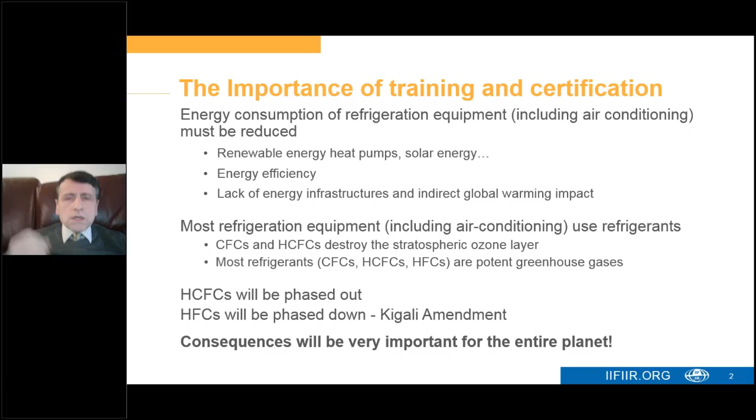And at the same time, we will have to phase down HFCs because of the Kigali Amendment of the Montreal Protocol. Of course, in developing countries, it is still not an obligation. We will start it in 2024 or 2028, but we already have to prepare it. We cannot wait until the phase out of HCFCs to move to low global warming refrigerants, and consequences will be very important for the entire planet. Because of the Paris Agreement, because of the Kigali Amendment, we have to face these challenges.

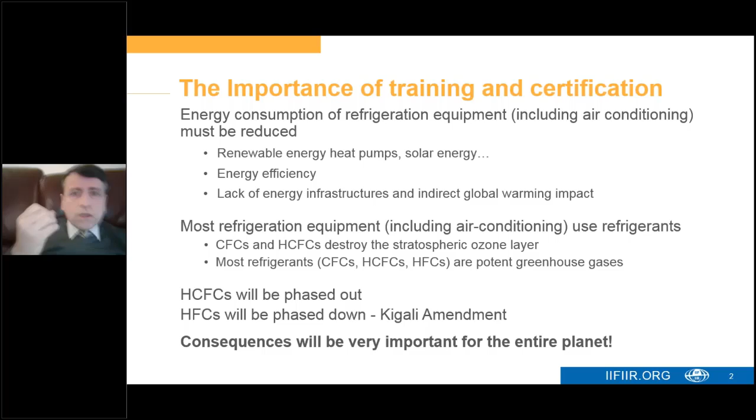Next slide, please. So we cannot wait for the phase out of HCFCs, and there are two issues for moving to low global warming potential refrigerants: safety and energy efficiency. So we need people who are able to install safe equipment and energy efficient equipment.

And because of that, training is necessary, absolutely necessary, because the use of these low global warming potential refrigerants is not exactly the same as the current refrigerants. Real Alternatives for Life is a remarkable tool for it. The International Institute of Refrigeration and its partners, and you will have afterwards the presentation by our partners in this European program, are at your disposal to help you.

Of course, it is a European program, but as you know, Europe is in advance of other countries. So in any case, the experience we have in Europe, the training we have developed in Europe can be applied all over the world, and I'm sure that it will be useful for all the world.

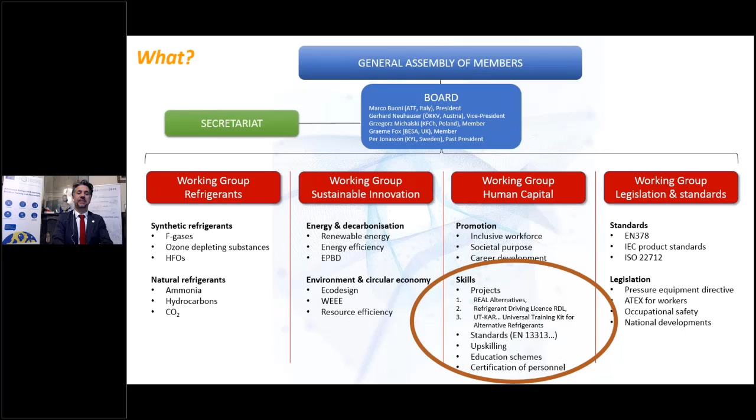So about AREA, we are an association of 25 European associations from 21 countries. We have a working group about human capital, training, about increasing competencies, and 3 projects about it: Real Alternatives, the refrigerant driving license, and universal training kit for alternative refrigerants. We work also on standards, in particular the EN 13313, which is a European standard that is becoming an international standard called ISO 22712. So our aim is to have skills and to have certification and education.

We have guides about it. We have translated in 16 languages guides about COVID, about EN 378, about training, and about certification. You find all of them on our website. But what we want to show you today is the revision of the F-gas regulation and why training is important in this revision. We are starting now a revision, a consultation.

First was a roadmap and an impact assessment. Now we are in a consultation process, and all the stakeholders are giving inputs to the F-gas regulation, what should be improved and changed. And all of 2021 will be for that, for stakeholder workshops, presentation, preliminary findings, impact assessment concluded, and in December, probably we are going to see a proposal for a revision.

And in 2022, 2023, after the ordinary legislative procedure, the European Parliament and the Council will adopt a new F-gas regulation. And what is the aim of this F-gas regulation? We want, first of all, to align with the Montreal Protocol, of course. We are already phasing down HFCs, but we want to align completely with Kigali. And further reduction in sectors not covered. Also the implementation and enforcement issues, illegal trade, training with alternatives, and other issues we want to tackle.

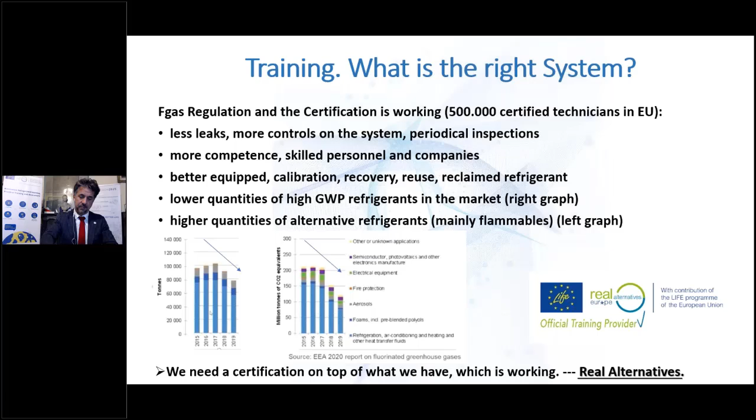And on top of these findings, we see that we need certification. We need more training for the use of alternative refrigerants, which are flammable, toxic, and high pressure. And so we need Real Alternatives. We need our project, Real Alternatives for Life, which Silvia, my colleague, the coordinator, is going to show you in a second.

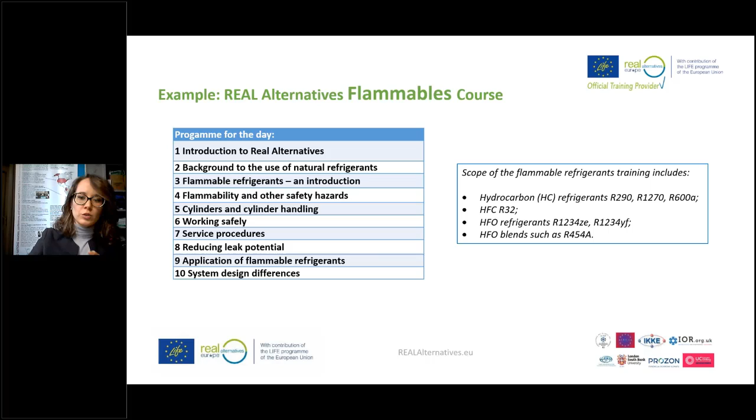There will be also something about the e-learning, but we don't have the time to go deep into that.

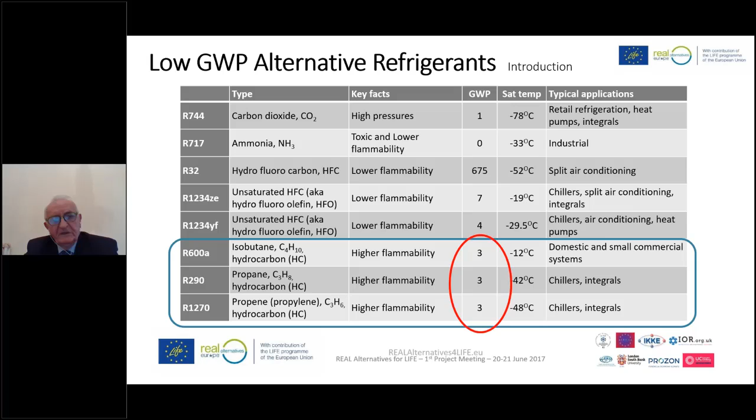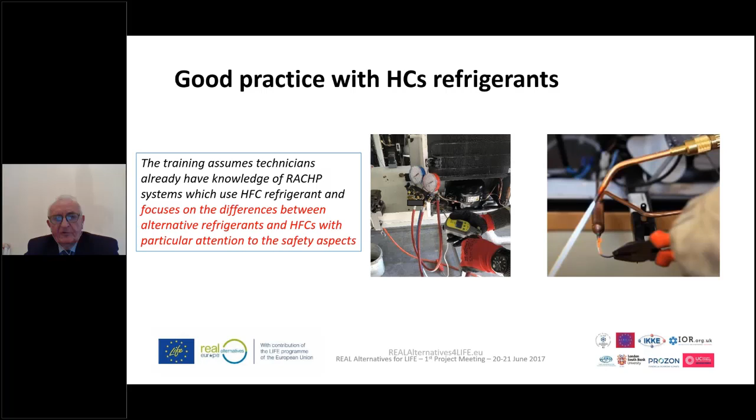The training assumes that the trainee already knows what to do with the HFC. So the training focuses on the differences between alternative refrigerants and HFC, with particular attention to the safety aspects. For the hydrocarbon, mainly it means flammability or risk of explosion. Next. Flame can happen when you have a potentially explosive atmosphere and have inside a source of ignition. Next.

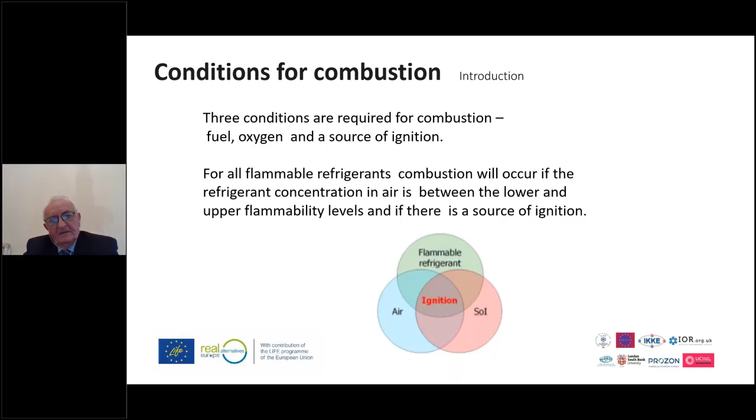For this reason, the main rules to be applied when someone has to design the system using the hydrocarbon are: first, sources of ignition must be removed from the flammable zone. Second, if you have electrical devices inside a potential flammable zone, these devices will be non-sparking type. And the training shows all the process step by step, how to reach this result when designing the system. Next.

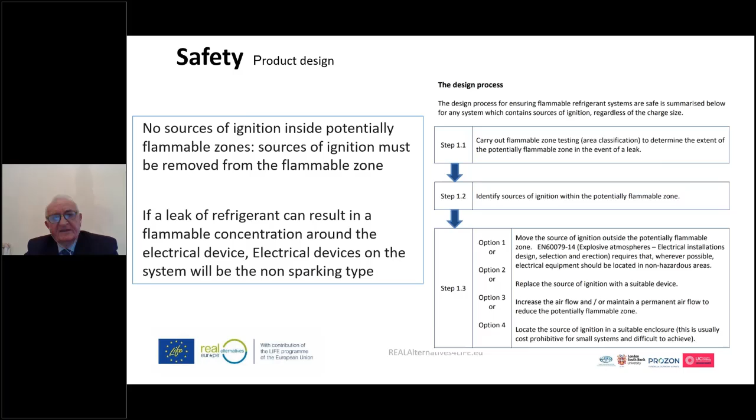There are a lot of details for the various operations, like, for example, the electrical connection that can be inside the potential flammable refrigerant zone, the fuse types and their use, the type of cable, boxes, etc. Next. And there are notes on the ventilation, like the fan for the condenser or evaporator, that can contribute to dilute, to dissipate the dangerous concentration of refrigerant from potential leaks. And there are warnings on possible abnormal use of the cabinet in the field, as well as about failure of some components. Next.

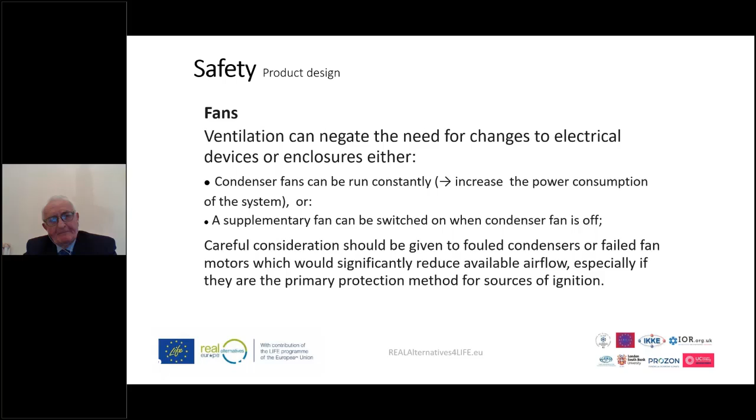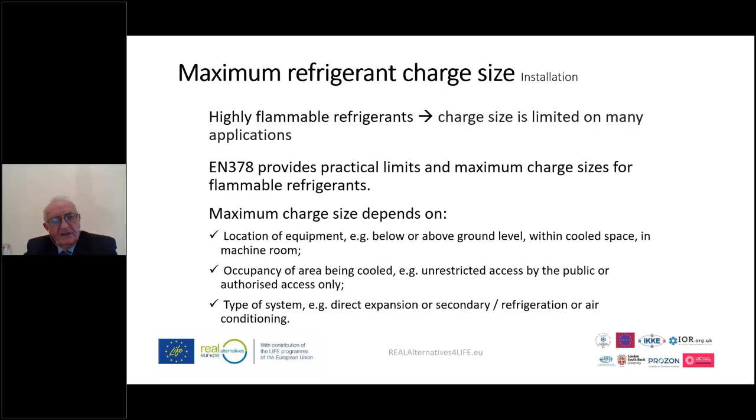When you have a cabinet, you have to install the cabinet in the field, of course, and the hydrocarbon, being highly flammable, has a size limitation for the refrigerant charge. The training shows you, according to the EN regulation, how to size the refrigerant charge according to the location of the equipment, occupancy of the area being cooled, and the type of the system. Next.

When you have a proper cabinet properly installed, it has to run for a certain time for its life, and you have to operate preventive maintenance and eventually repairing. Repairing in the field for the hydrocarbon represents the moment of higher risk. And the training has details and pays a lot of attention to this part of the activity.

First of all, it's necessary to carry out the risk assessment. That means evaluate the likelihood of a negative event and the impact of this event, and take preventive action in order to minimize the risk to a level that you can run without problem. Next. There are indications on the proper tools to be used, and you can practice the tools in the practical training in the classroom. Next.

And preventive actions to be adopted are listed with a lot of details. The working area must be very well ventilated, eventually with fan motors that need to be ATEX approved. It's necessary to use a personal monitor and detector. It's important not to have an ignition source in the working area for a volume, let me say, of around 3 meters, and have a fire extinguisher at hand in case of use. Next.

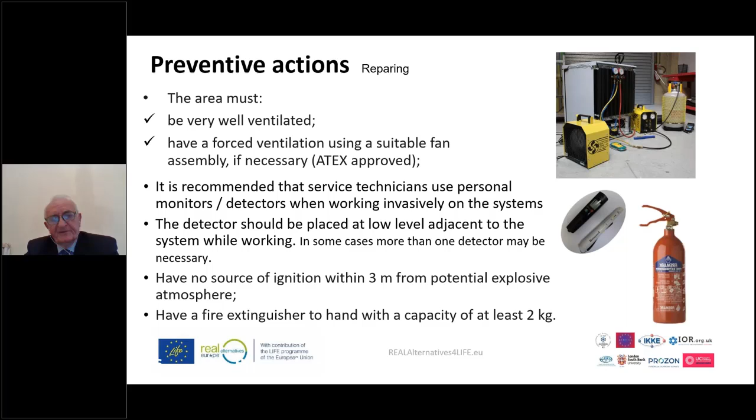Also, there are instructions about the equipment to be used with flammable refrigerants. The equipment used with hydrocarbon and other flammable refrigerants must be ATEX approved, especially the recovery machines, and in certain cases also the vacuum pump, and there are solutions for adapting a standard vacuum pump. And for each operation, like refrigerant recovery or vacuum in the system, there are step-by-step all the instructions to follow in order to perform the proper operation in safe conditions. Next.

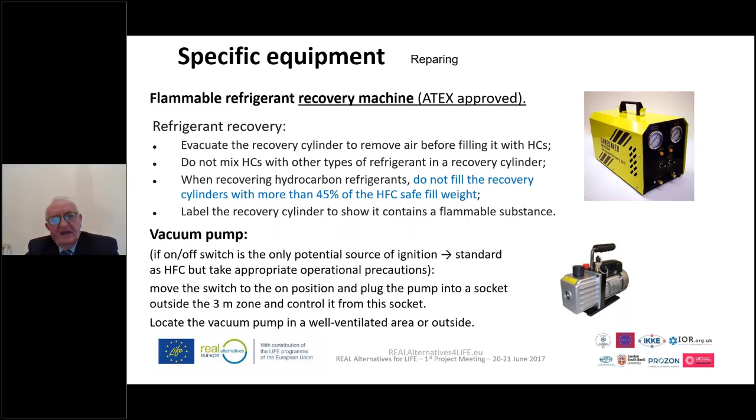Particularly critical is the brazing and unbrazing operation, because you are using flame where there were explosive flammable refrigerants; you have to clean all before, and there are instructions how to proceed to be safe in the operation and to properly weld the connections, for example, by flowing nitrogen inside the tubes. Next.

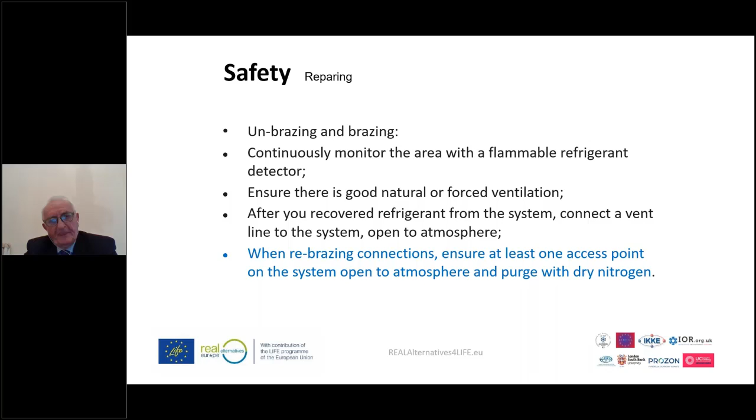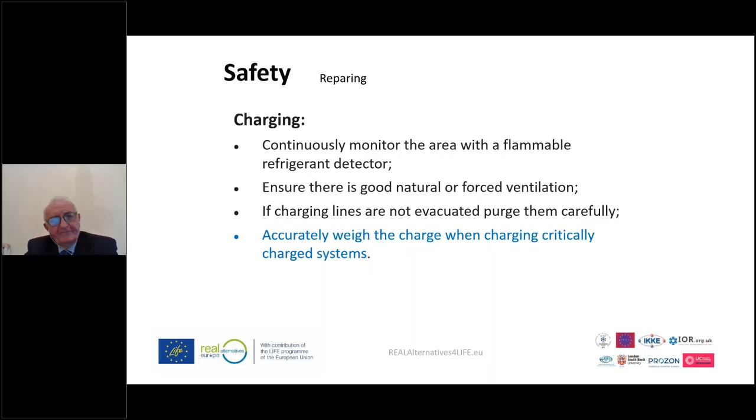The same care in the details of the operation is also listed for the charging of the system, for the safety, and for the charging in the system itself regarding the weight of the charge, because normally the systems with hydrocarbons have very small refrigerant charges. And particularly there is attention for the filling of the recovery vessel. Next. Next.

Well, when you have performed all these operations and you have arranged the cabinet, finally it can run in the field. However, what I wish to say is that field experience has evidenced some accidents in repairing operations when you work with flammable refrigerants. And also there are accidents with other refrigerants like CO2 or ammonia. So I wish to stress the fact that practical training has a high prevention relevance. Not only does the trainee have to follow the theoretical part, the learning modules, the bibliography, etc., of this web training, but it's important to have the practical training also.

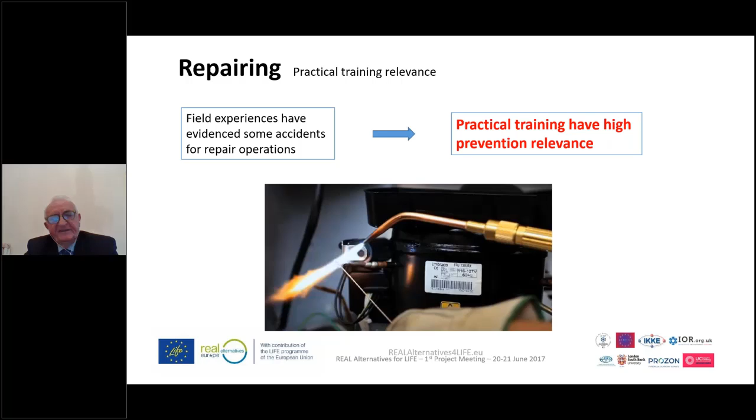In this way, next, after an assessment of the knowledge of the trainee, it's possible to issue the certification of the trainee. The certification is important because it's a certification of the theoretical knowledge and also knowledge about regulation, and is a good argument for the technician, because practically all the cabinet producers, the end users, the service companies, of course, require qualified people for the use of hydrocarbon refrigerants as well as other alternative refrigerants.